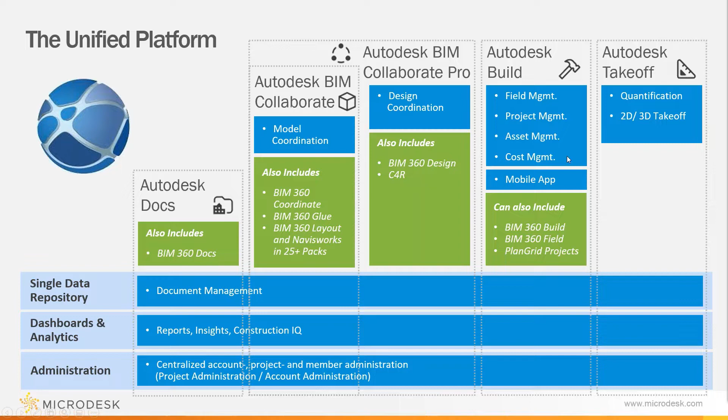So what can I do with the Autodesk Construction Cloud Unified Platform? As I said before, we will focus on Autodesk BIM Collaborate Pro today. So that will be coordination and design collaboration plus Autodesk Docs. So that's kind of the easy answer.

What is exactly Autodesk BIM Collaborate Pro? So yes, it's no more than coordination, design collaboration, and Autodesk Docs. There's a few things that has changed comparing with the previous platform.

So for example, now with coordination and design collaboration, we also got meeting minutes. Previously, if you wanted to get meeting minutes, you needed to get it inside Autodesk build. Now it's also included as part of the coordination and design collaboration package, which for me, completely makes sense.

If you're working in a coordination and collaboration way, you will need to have some kind of meeting minutes inside your common data environment, inside your CDE, rather than using meeting minutes with external software. So I think it's a great tool that can be used inside our CDE.

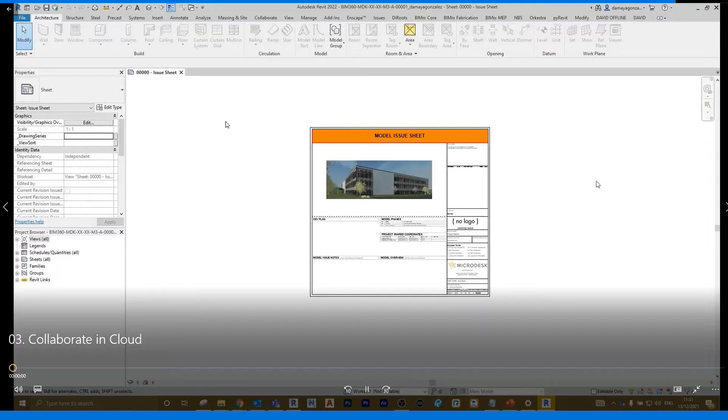It's really easy. We just go to Collaborate inside Revit, Collaborate in Cloud, and then we choose the right project, select the right file and the right folder, which in this case will be the architectural model. So inside work in progress architecture, make sure the name is correct and simply click save.

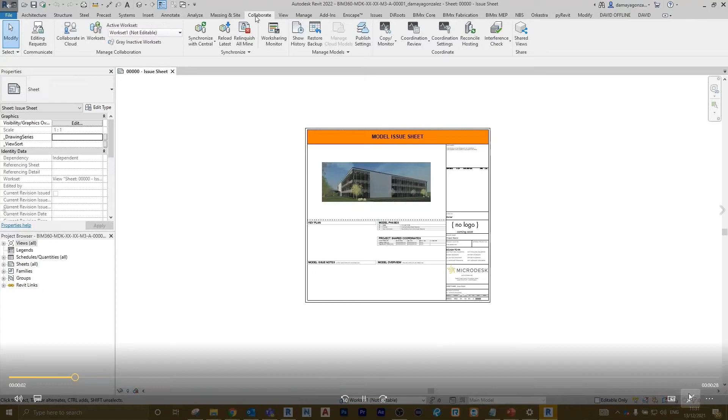After that, our model will be work shared inside Revit and inside BIM 360. That leads us to the next step, which is how we're going to collaborate with other consultants or disciplines. The platform gives us three options.

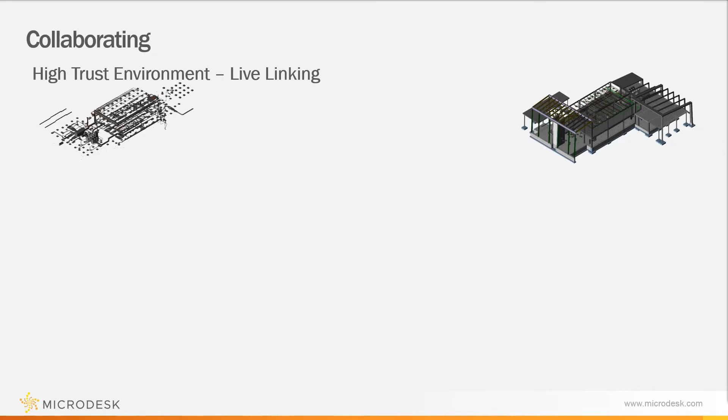I'll go through all of them one by one. The first one, which I don't recommend, is called the high trust environment of live linking. Essentially, we link other consultants' models directly from the work in progress model. The reason I don't like this is that if we link from that model, every time they make an internal change, we'll see it, and we might not want that because it could interfere with our design process.

So to avoid that, we have two other options. The first is the medium trust environment, control sharing from share. That means the other consultant first needs to create a package with that information and send it to us, and we get that information updated because we link from the share folder rather than the work in progress folder.

Then there's another step further, called the low trust environment, control sharing from consume. It's the same as the medium trust one, but this time we have to review the package before we have it in our consume folder. The other consultant creates a package, sends it to us, we get the notification, review it, and once we're happy with it, we consume it. After we consume it, we link from our consume folder.

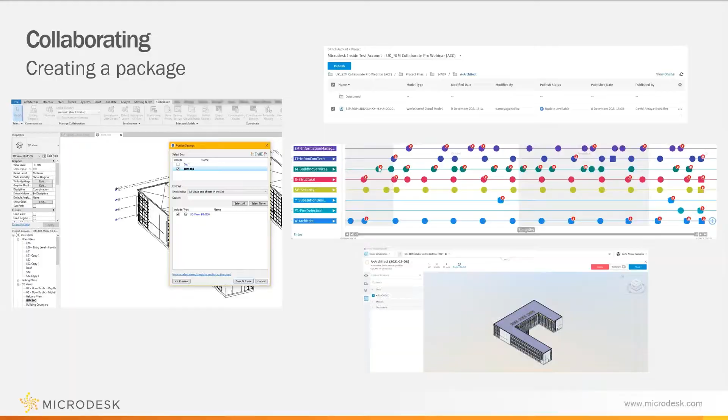Really easy, we go back to the design collaboration. So here again we are in design collaboration, and we're in home.

And here's the swim lane, basically this is a timeline of your project. It will show you every time you create a package, every time you consume a package, every time another consultant shares a package. So it's a really good way to track what's going on in your project.

And how do we create a package? So first, obviously, we need to be in our folder. I'm acting as an architect now. Obviously I can change between things because I've got project admin permissions here. You won't be able to do that if you're only an architect.

After we are in the architect's timeline, we simply go on the right side, click plus. Here, second, we will give in a date, for example, or you will need to follow whatever standards on your BIM execution plan you have for that project. So we go 21, 12, 13, happy with that.

And then I will create and select the sets and models that I want to create for that package. So in this case, I'm sharing my architectural file. I click save.

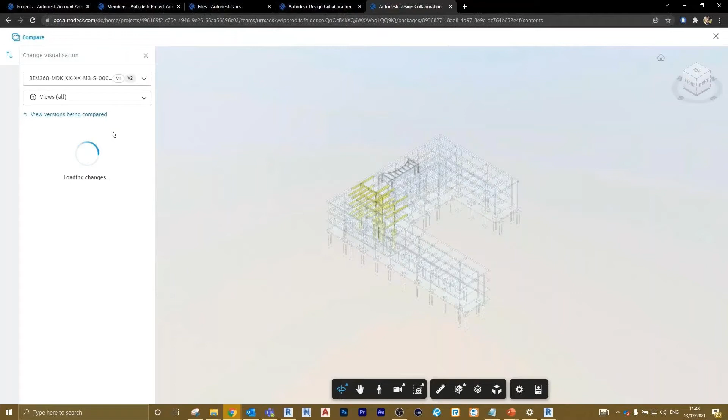So we're gonna compare version 1 versus version 2, and we're gonna see what's been changed in the last one. As you can see, I can see here on the left side that nothing has been added, nothing has been deleted, but 67 elements have been modified.

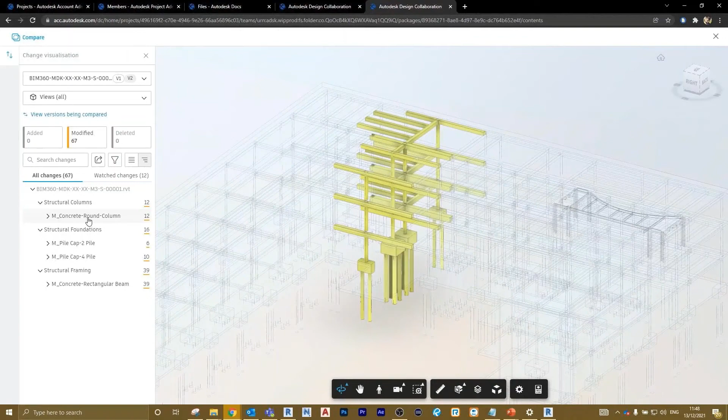So I can go ahead and click on that, do a quick review of my model, see if I'm happy with that. I can see what's been modified, and then if I go to the individual element, I can see what happens. So yeah, on the right hand side, you can see that's been moved 2000 millimeters.

So then I can make a decision on that. I can say, okay, I'm happy with this, and go ahead and consume the package. The way to do that is simply, we click the window now and close it, we click consume. After we click consume, it'll send that model into our consumed package. Now, after reviewing that model, we have updated our model in our Revit file.

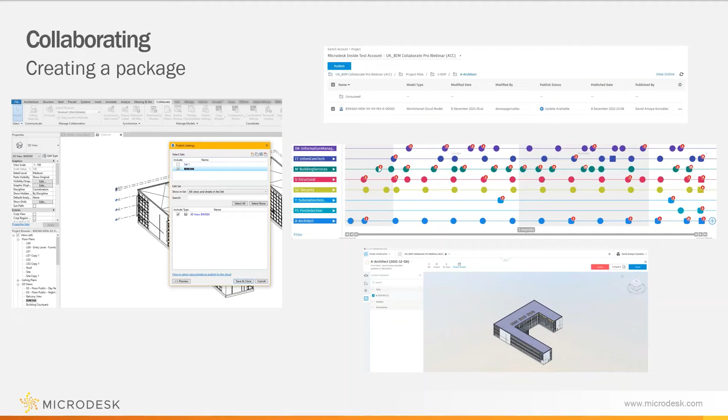The next step, I go back to my... second, yes, okay. Yeah, I just explained that about the consume.

So now we're gonna explain the approval workflow reviews, and this comes back to our ISO 19650 workflow. So before, as you remember, we drop our BIM execution plan in our information manager folder. And now that's obviously in our work in progress, so nobody has seen that. So now we want to send that into our publish folder so everyone can see it.

So how would we do that? We could use, this is not obviously the only method, but this is a method that can be used: the approval workflow inside the unified platform. If we go to reviews, first we will need to set up a template. I already set up one.

As you can see here, I go from share to publish. If I go ahead inside there, you can see the settings from this specific one is just one step of verification. Then I can tell which person, company, or role can initiate it.

In this case, I want companies, everyone inside those companies can initiate this workflow. After that, I can decide who is the final reviewer. In this case, it's going to be me, acting as an information manager. I can tell how many days I have to do it, in this case 3.

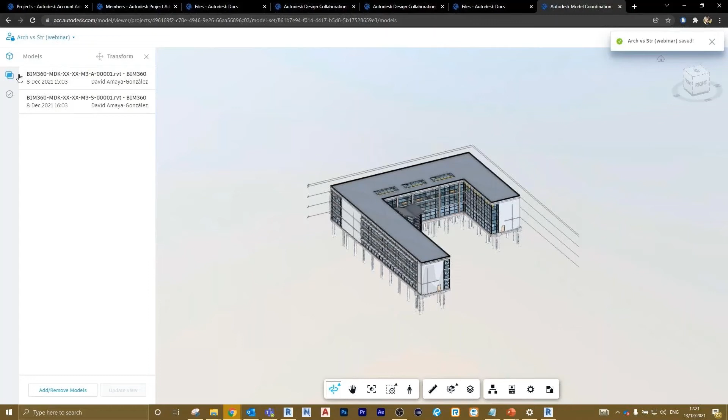I can see, for example, all the issues that are being assigned. I also see the clashes. So I can select my primary model, which in this case, I'm gonna select architecture against my structure.

And then I can select group by. So we got by object, but we also got any parameter that I combine between both models. I can use it. For this time, I will keep objects, I will click just millimeters, and then I will start going through all my clashes.

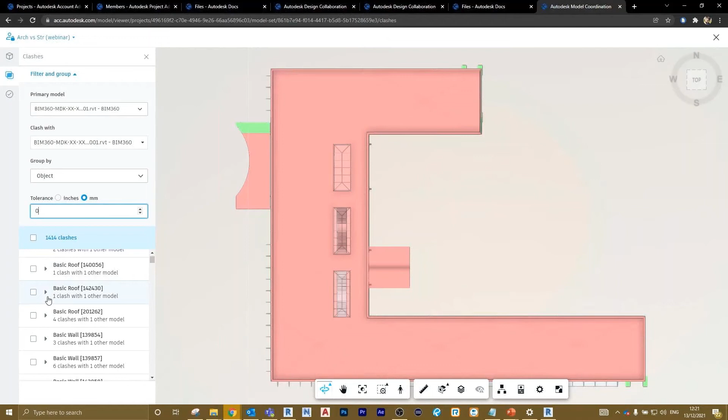For example, if I go to this one, it's a roof that is clashing with the floor. I can see this issue there, and then I can act based on that. So I can say, okay, this is an issue.

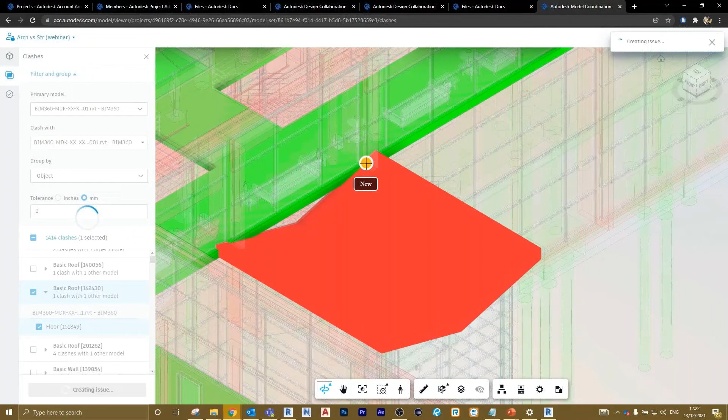After I create my issue, I can start populating it with a title, status, type, and description. At the moment, I'll keep it as open. For this one, I'm going to use it as a design issue, coordination issue. I keep the description as is, and I can assign it to the person I consider appropriate.

In this case, I'm going to use Darren because he's part of the architecture team. I can also add watchers, so it's not assigned to that person, but they can be aware of what's going on. And then also the due date and start date.

As you can see, I'm tracking my issues. I keep it in the same place. Again, we're talking about CDE, Common Data Environment, one source of truth, which is what we want when using BIM. I can add some comments as well. And yeah, so in that way, we create our issues. Easy as that.

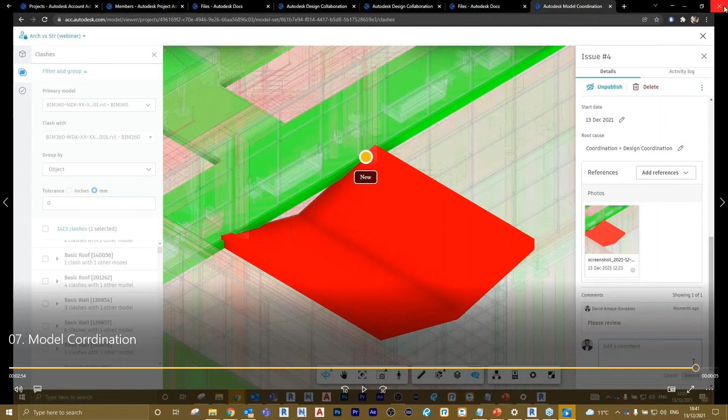Okay, let's go back to our presentation. We're almost finished now.

So yeah, now let's just look into the questions. Feel free to ask any questions now. I don't have any questions at the moment, but we will wait a couple of minutes if you have any. Let's check the chat, if someone put something on the chat instead. No.

Okay, I got a question here. One second. Actually, I got all the questions. Can you extract a report of changes? Yes, you can. Let me just show you that.

So if I go back, I believe you are talking about when another consultant shares a model, you'll get to see those changes specifically. Yeah, that's a new tool that we have in the unified platform. So if we go inside design collaboration, I'll go into changes. Here we can add specifically items that you are interested in. For example, as you can see here, I've added that I'm interested in columns from the structural model.

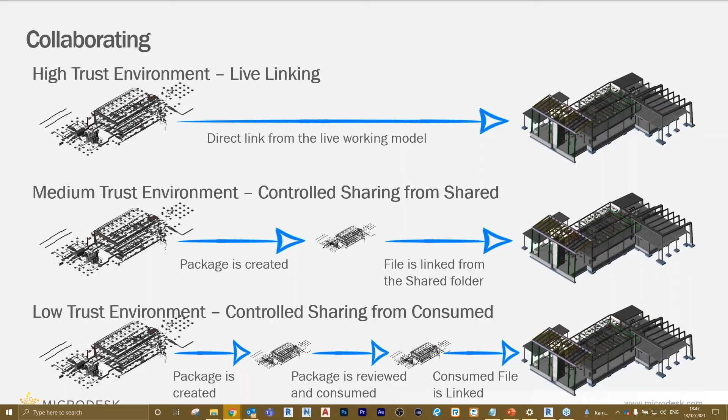Personally, if you ask me, I always go for the low trust environment. It's a bit weird that they call it like that because it feels like you don't trust the other discipline, but it's just a matter of putting another security control into that. So me, as a discipline, as an architect, for example, I will always go and review the packages and then I will consume it. I'll make sure that my team has the correct information.

So yeah, good question. Another question we have here: can you obtain a clash detection report from BIM Collaborate Pro, and do you need your own Navisworks license? First question, yes. Second question, if you use model coordination in the cloud, you're not technically working with Navis.

So I'll show you, give me a second. Second, it's displaying. Just give me a second. There we go.

So when you go to model coordination, these models come directly from Revit. So technically, you're not using Navis here. You can actually open the model coordination tool inside Navis, but that's something that will take just another webinar for itself.

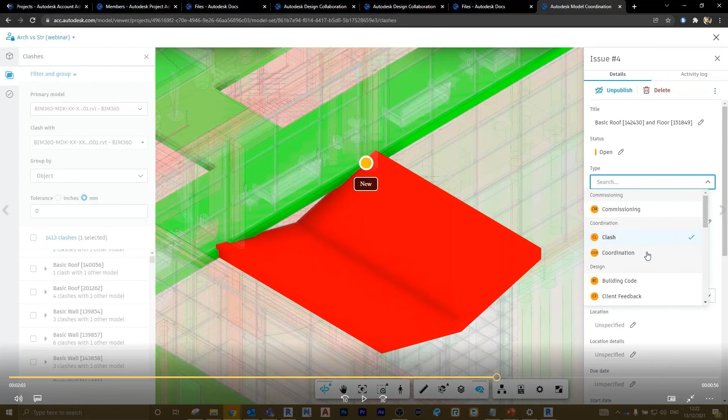Okay, I got another question from Robert. Hi Robert, I work for an architectural practice. How do I link architectural models into my Revit model? Yeah, so that's really easy to do.

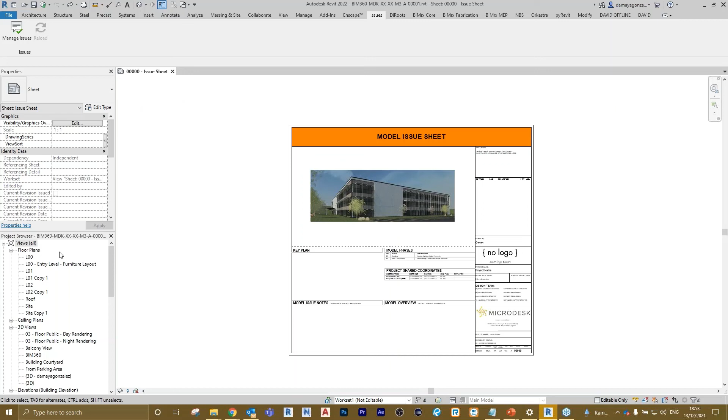So just as a final question - after you use any method I showed you before, either consume or share, anything inside your Revit model, it's as easy as going in. You cannot do it from the sheet, so you go into any view, then go into Manage.

Here I am in the architectural model, so I'll be showing the linking of structure, but the workflow will be the same. Inside Manage, you go to Manage Links, and here inside the Revit tab, you choose to add from.

Because, for example, you already consumed or shared a package, you will see those models there. Let me just go back one folder. So you need to make sure you pick up the right project, then go into project files.

This one is going to use share, for example. I'm going to go into structure. I will link it there.

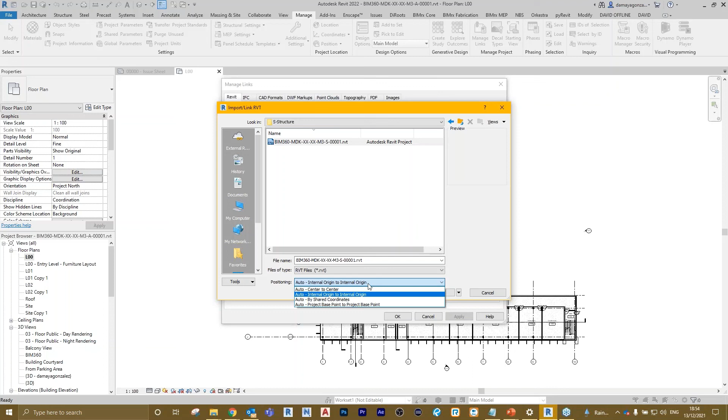Then here you have a couple of options, depending on if you want internal origin to origin. I know this project is set up with shared coordinates, so I'll go ahead with shared coordinates. Yeah, so that's been loaded, and that's how you link it into your Revit model.

Okay, share thing - yeah, so I think I got most of the questions. Again, feel free to send us any questions. Oh, one second, last question. Let's do that one, why not. We've got 5 minutes, I saw you.

It's a question from Andrea Davidi - I hope I spelled your name correctly. I saw you use companies to group users. Is there any other way to group? Is there another way to group users for permission managing, like assigning permissions? If I understand your question correctly...

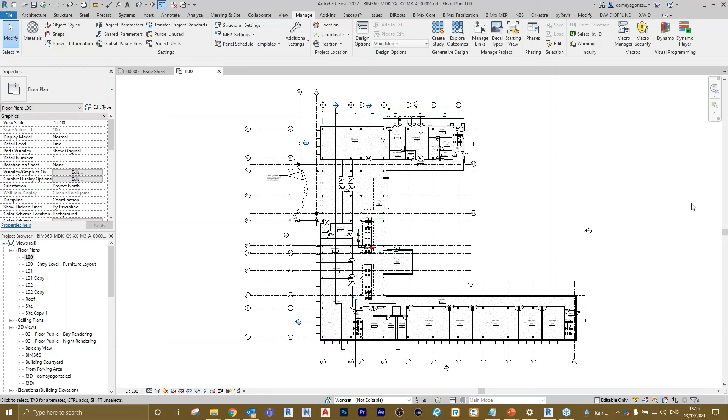Yes, short answer is yes. So if I understood your question right, if you go back to our platform, you could add a lot of members, let's say via spreadsheet, directly in the Account Admin. So if you do it here and go to Members - yeah, that will be inside BIM 360.

As you can see, now I'm going back into the current platform. Some of the options are still on the other platform. So if I go to roles - still in the same project - but for this question you asked, it needs to be done in the previous platform.

So here you'll be able to add in bulk - you can add a lot of members with a spreadsheet rather than on an individual basis. So that's an option. But just in case that's not what you were asking, let me come back a second.

If I go to Project Admin, Design Collaboration - just in case that's what you mean - inside Design Collaboration, if you go to Settings, you could also add here by role, companies, or individual names. So yeah, you could do that individually, by company, or individual name, and this is at the teams level.